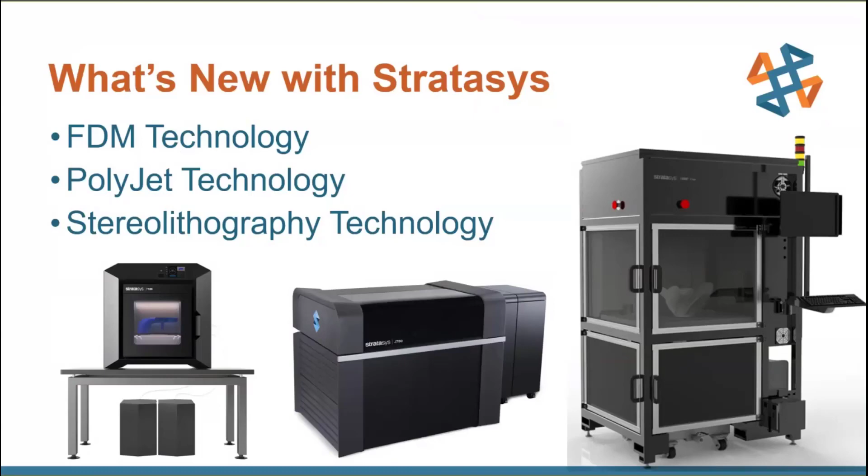Starting off with the FDM, which is fused deposition modeling. Most people are familiar with it because it's the most common out there with all the hobbyist type machines. Of course, the difference on Stratasys machines is that they use two print heads and a support material that will dissolve away, making it much easier to build parts.

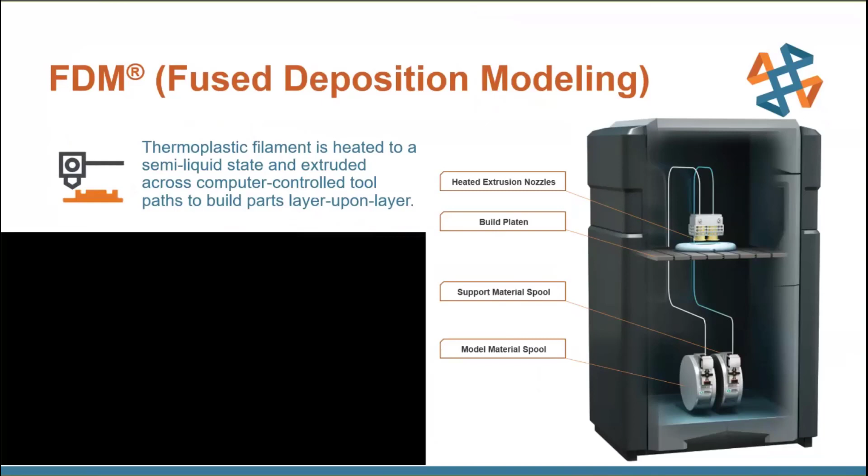What they've added to the FDM now is the F120 series, added to the F123 series. This is an industrial desktop model, and it's based on the F123. In fact, it uses the same platform as the F170, so the trays are pretty much interchangeable. They're the same size. The only difference is this is a desktop model. You don't need any specialized training, you don't need a dedicated technician for this, and it's very intuitive in the GrabCAD print software. We're going to talk more about GrabCAD software.

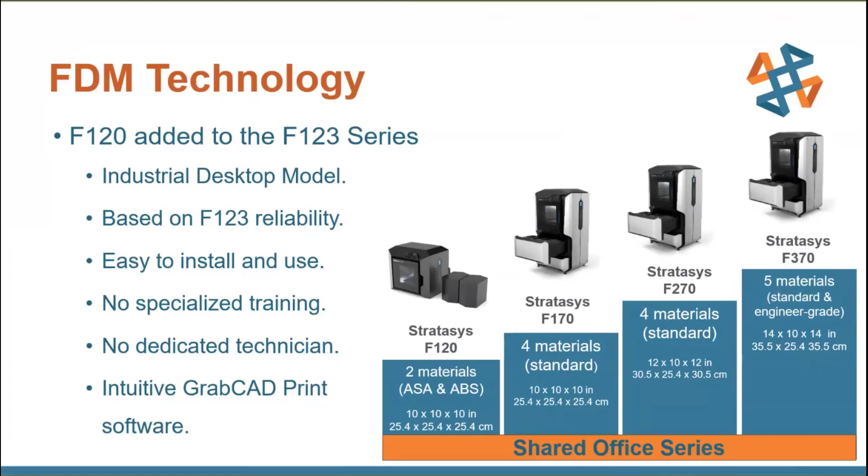It runs a build volume of 10 by 10 by 10. Currently there's two materials available, the ABS and the ASA. For those not familiar with ASA, that's a material similar to ABS, but it's got UV resistant properties, for applications where it's going to be outdoors. Right now there's only white and black, but the ASA is a good choice.

It has a soluble support material, and we build it in layers of 7, 10, and 13 thousandths of an inch. You'll notice in the picture, the two boxes on the bottom there are the print material. There's 200 cubic inches in there, and you can actually print for 250 hours continuously. So it's not like other machines that only have 100 cubic inches or less, sometimes 60, where you end up having to swap materials out. Here you're going to get a lot more runs, so it's more office friendly. People don't have to change materials out nearly as often.

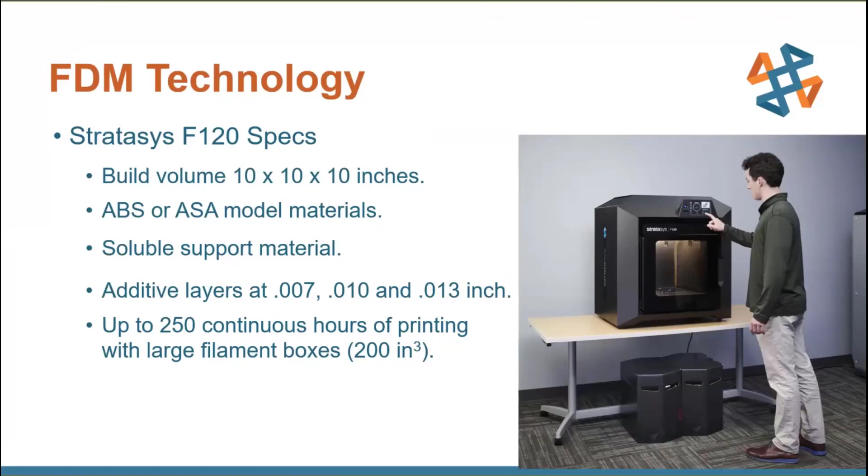Looking at GrabCAD print software and some of the changes they've done, I should mention that GrabCAD print is free software out there to download. You don't have to own a Stratasys machine to view and estimate files with GrabCAD print, so it's free out there. You can use your CAD files, you can use STL files, so it'll take native files as well.

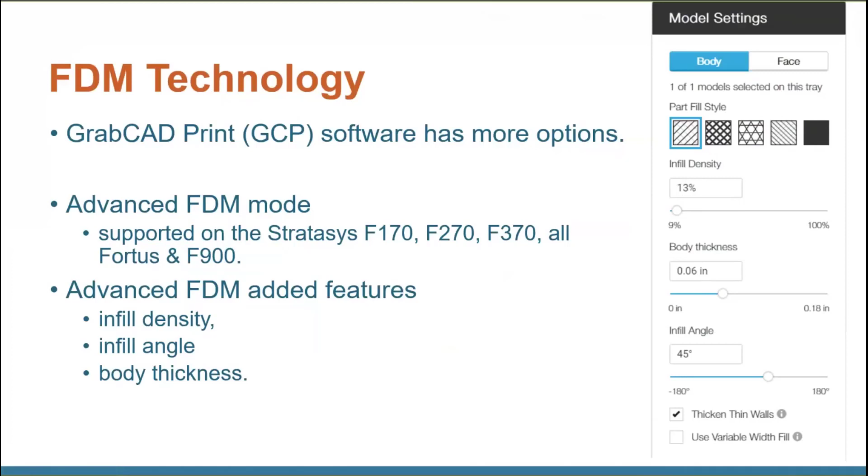What they've changed and added in GrabCAD print, you can see up here where they've put in different support icons so you can see what you're getting for your fill inside. They've really changed it, you can change your infill density here. If you want to make that wider or smaller, you could do that. Also the body thickness has been changed on here. You can add more body thickness. What that means is the perimeter or the border, if you decide you want your part to have 1/8 of an inch thickness and still be hollow inside, you could change that to 0.12, 1/8 of an inch. You can also change the infill angle on there. Currently 45 is the default. It works well, but it's allowing you to change that. So lots of new things with GrabCAD print.

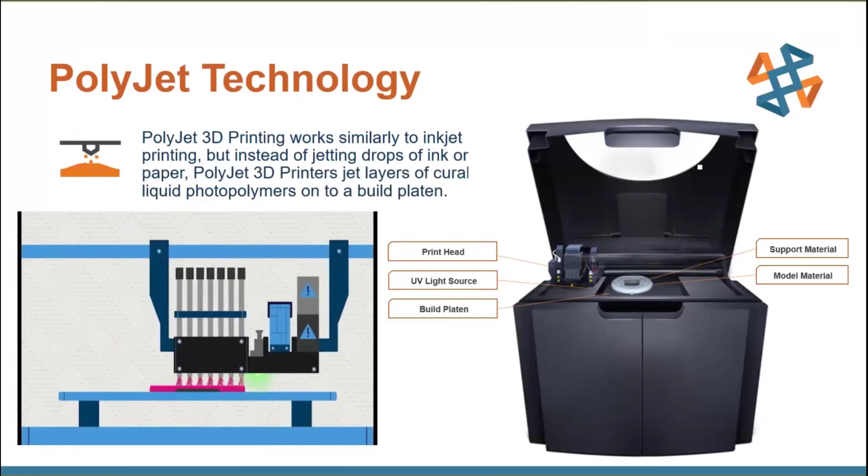PolyJet Technology is a 3D printer that works real similar to your inkjet printing head that you have at home. The only difference is you don't have a Z-axis on your home printer. Here you've got a Z-axis.

What's really changed on PolyJet is that they have a breakthrough. This is a milestone in 3D printing. Stratasys J750 and J735 are the first printers with the ability to print color quality validated by Pantone. Pantone is the industry leader defining standards that communicate consistent colors across many industries. So the Pantone colors here are

key to getting quality, realistic looking parts. In the GrabCAD print software, you can easily select almost 2,000 printable colors. You can select it either by the number, if you know it, or by sliding the range up and down the slide bar. So you're going to get good quality models.

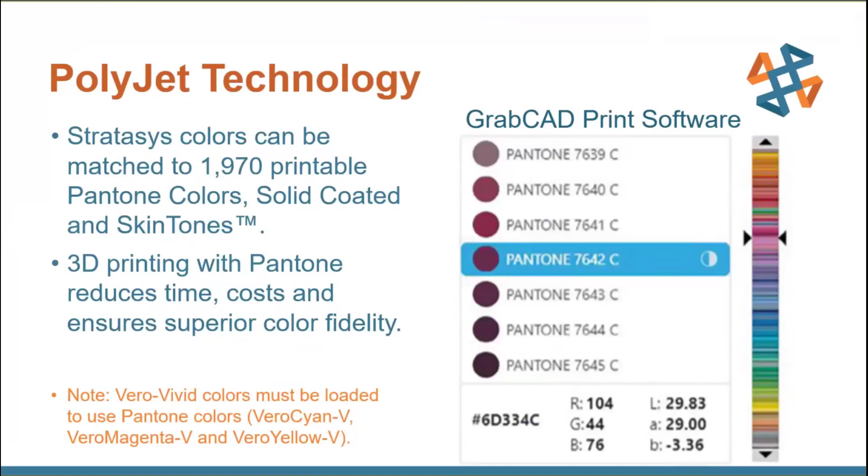Now another thing they've added is the Agilus 30 white. We've had Agilus 30 black and Agilus 30 clear for quite a while. Those are our stretching materials, rubber-like materials, flexible. And now you can take the white and you can add colors to it.

However, I will tell you that the more color you add, the stiffer it will be, because you're taking away more of the Agilus flexible material. Therefore, the more pastel your color looks, the softer it's going to be. So you can either pick a color, you get a little flexibility there, or you can actually pick the shore value and it'll tell you what color it's going to blend and be there. So there you can see a range of softer, will be the lighter colors, and as they get darker, those will be a little stiffer.

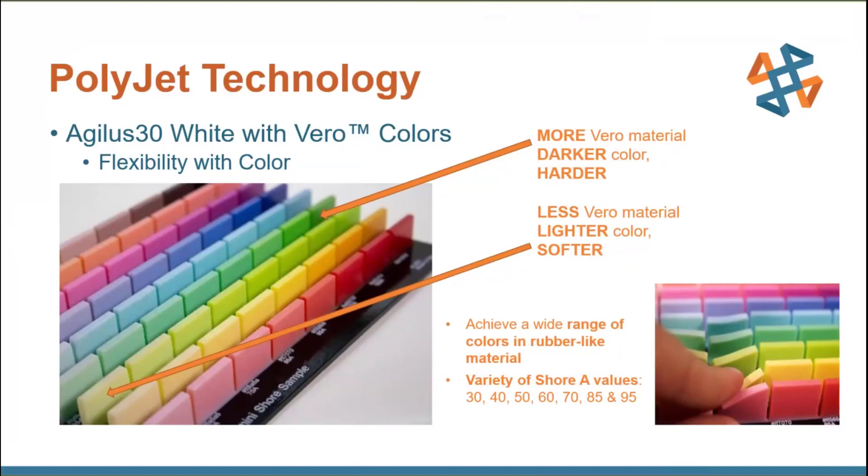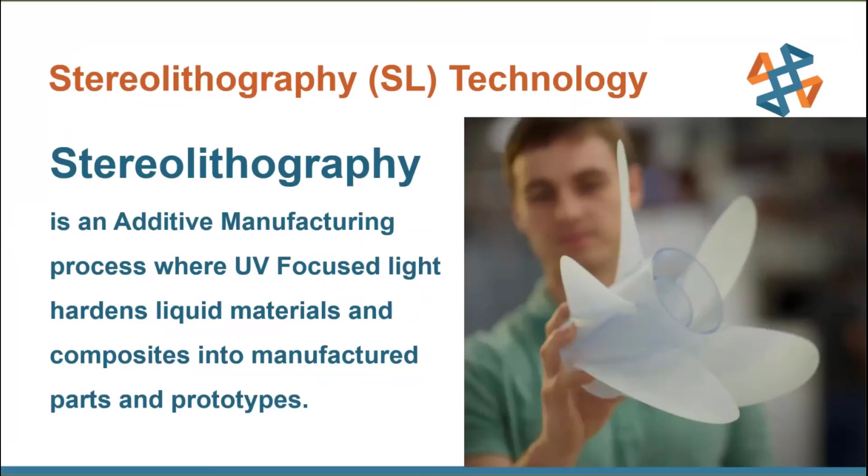Stereolithography has been around for 30 years. It's actually the first 3D printing patent that was out there. In fact, the word stereolithography was invented in 1984 for the patent. It actually comes from three Greek words: stereos, meaning three-dimensional. I know a lot of millennials think that stereo means two speakers. It actually means three-dimensional. And lithos is hard or solid, and graphos is printing or writing. So it literally means three-dimensional solid printing. That's where the whole 3D printing industry started.

Again, it's been around for 30 years. It's been accepted for a wide range of applications. So Stratasys is now introducing a stereolithography machine.

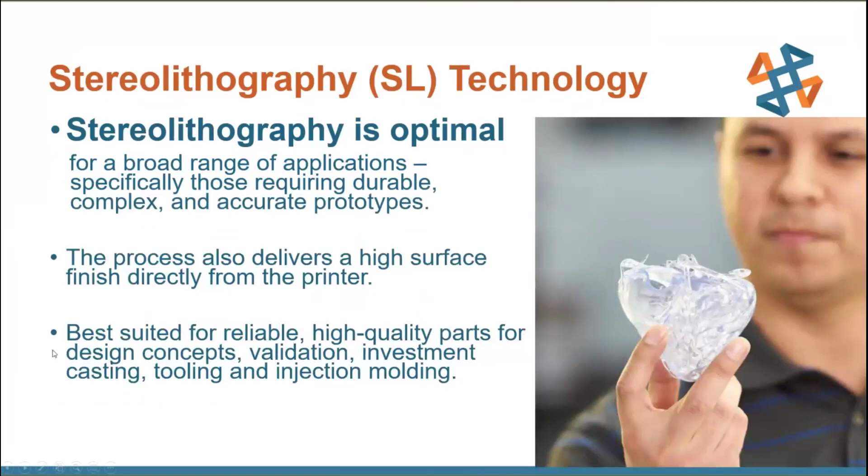Just to give you an idea of how stereolithography works, also called SL, it starts with a UV laser. The UV laser shoots out an ultraviolet light, goes through an optics filter, and that separates 355 nanometers in there. Now, once you separate it, it has a scanning galvanometer. That really is just a servo motor with a mirror on it that is going to position and focus and move that beam that's focused on the surface of the resin in the vat.

Now, the platform goes up and down in the z-axis. The scanning mirrors take care of the x and y, and your z-axis is taken care of by the platform. And it hardens each layer one at a time on the top until you build the entire part, and it repeats the process.

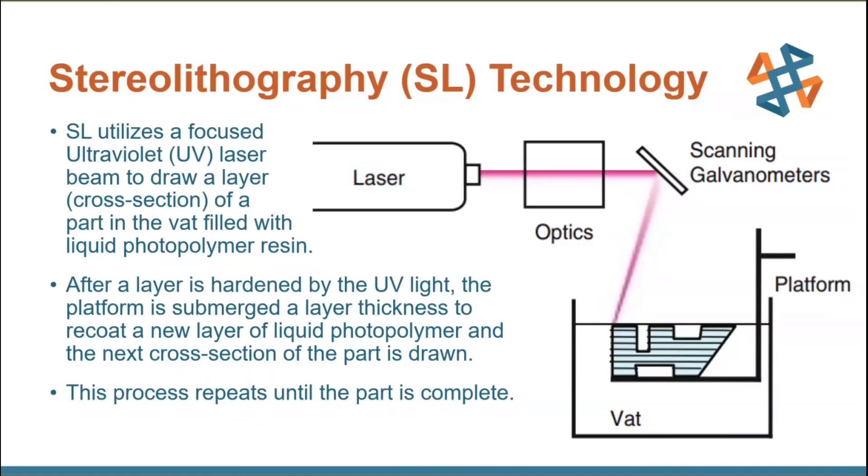So we're introducing the Stratasys V650 Flex. The V stands for vat polymerization. That's a designation from the ASTM F42 standard that defines additive manufacturing technologies. Flex refers to flexible for an open source material. You can run any resin you want in this as long as it will cure at 355 nanometers. Therefore, you could develop your own material if you wanted to.

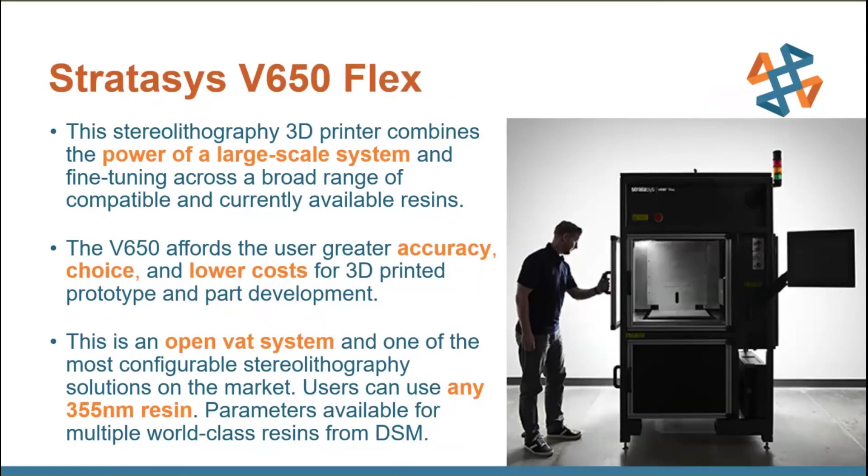So it's got a large build volume, 20 by 20 by 23. This is going to really help for production type parts. You can get down to 0.004" build layers. You can build greater than that, but 0.004" is typically what you get down to. The beam size is adjustable for fine detail, or for big parts, you can go up to 0.030". And it's got a fast draw speed of 700 inches per second.

Again, on the vat system, the customer can use any resin they want. But we're starting off with 4 profiles or set of parameters of DSM resins that are commercially available. DSM Somos has been in the business for many, many years, making stereolithography resins, recognized as a leader in the industry.

You also have interchangeable vats, full, quarter, or half vats. And the reason this is important to you is not everybody builds parts 23 inches deep. So if your parts are only 9.5 inches tall, you may want to consider a half vat so you don't have as much investment material, the liquid material, in the vat itself. There you've got some choices on your vat size.

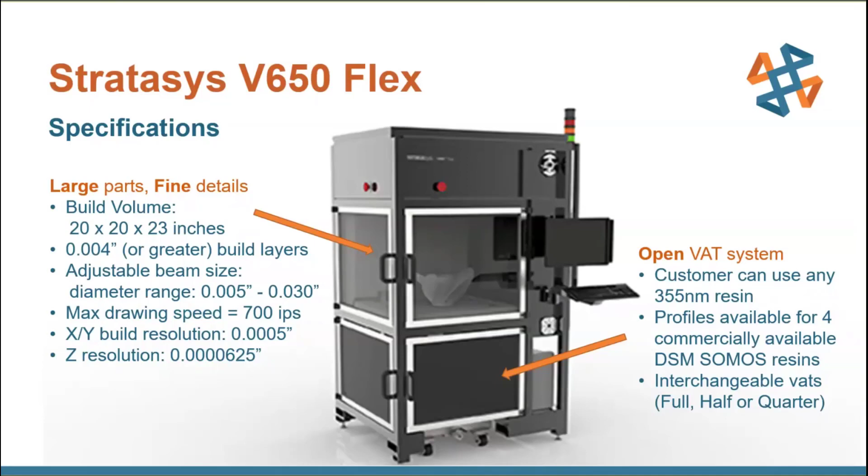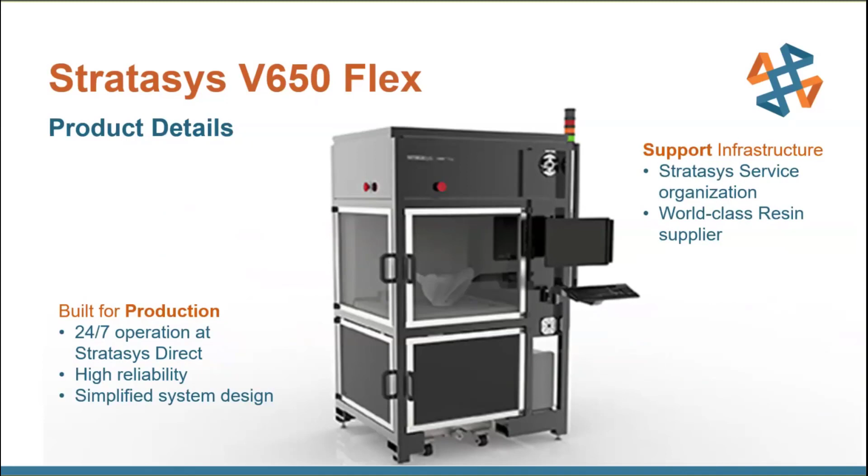It's built for 24-hour, 7-day operation. This has been tested at Stratasys Direct, the service bureau that Stratasys has, and they've been using it for over 4 years now. They've been using 24 hours, 7 days a week operation out there. High reliability. It's a very simplified design.

One of the problems with stereolithography from the foreign market out there, there's a lot of them out there, is getting parts and getting reliability issues. Here we're going to be coupled with the support infrastructure that Stratasys already has, and we're going to couple with a world-class resin supplier with DSM Somos. So that's going to help our reliability considerably.

Your site requirements, it's got a smaller footprint than the competition out there. It doesn't require anything special. You can run on 110 or 220 out there, single phase.

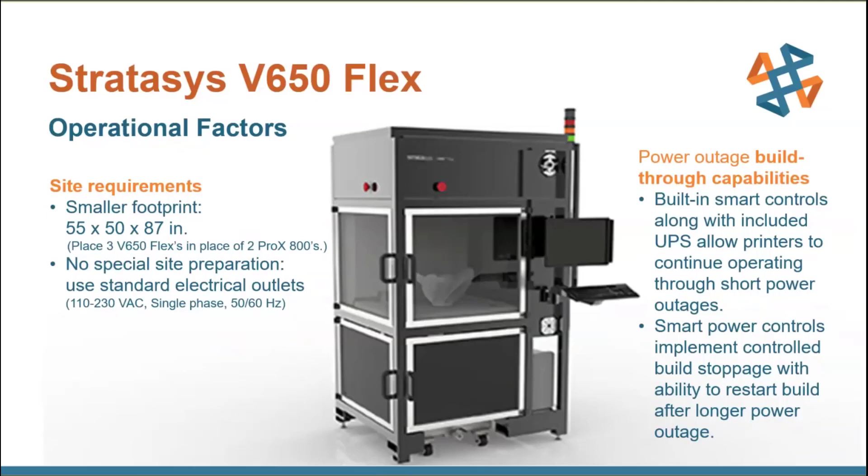It's got some smart controls built into it so that it allows the printer to operate for a short time. It also records the build layer it's on, so if you've got a power outage that lasts longer than the UPS backup, you can actually restart the job when you get power restored. That's a key function when you're building big parts.

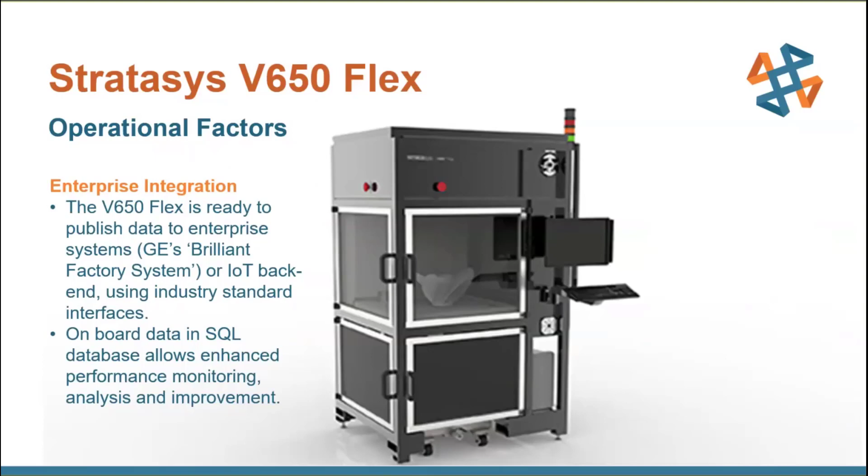It also has the integration for a database, so you can interface, communicate in database for your monitoring. Lots of companies out there that want to monitor, to do SQL language in there. They also want to do statistical process control. This monitoring allows you to do that.

Let's talk a little bit about the materials, so you can know the difference between photopolymer materials and engineered plastics. When you're running with FDM materials, your FDM materials are softening plastics. ABS, nylon, all those engineered materials out there, they become pliable and moldable in injection molding.

Think of it like a chocolate bar. You can melt that and form it, remelt it and form it, melt it and reform it all day long. Now your photopolymers are a thermoset material, not a thermoplastic, but a thermoset. Once that liquid is kicked off, think about a two-part epoxy. Once that material is kicked off, you cannot put it back into a liquid form.

Once cured—and I've got an example down there, it's crackers and some flour—you mix that flour with other ingredients, but you'll never be able to pull it back out and get it back to its shape where you can make crackers again. So it's a thermoset material. It can be burned out under high heat, but it will not melt.

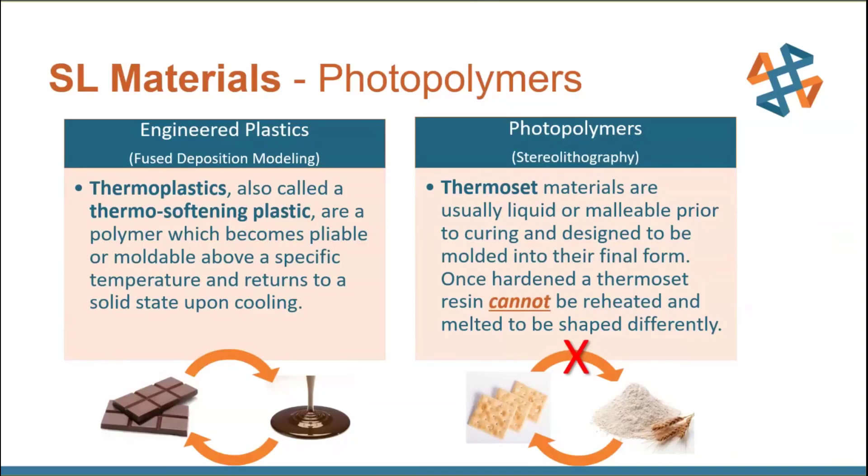So the four materials we're looking at with DSM Somos: the first is Somos Watershed XC. That is a rigid, clear material that has been used for well over 10 years, and it's the most popular general purpose material on the market due to its clarity and water resistance. This is one of the key general purpose materials out there.

The next one is a Somos Next material. This is tough, durable, impact-resistant—you can bounce it on the floor without breaking it. It's really tough, and it's for general use parts. But both of these will work well for the majority of parts. The high impact Next is great if you want toughness, and of course the Watershed if you want the clarity.

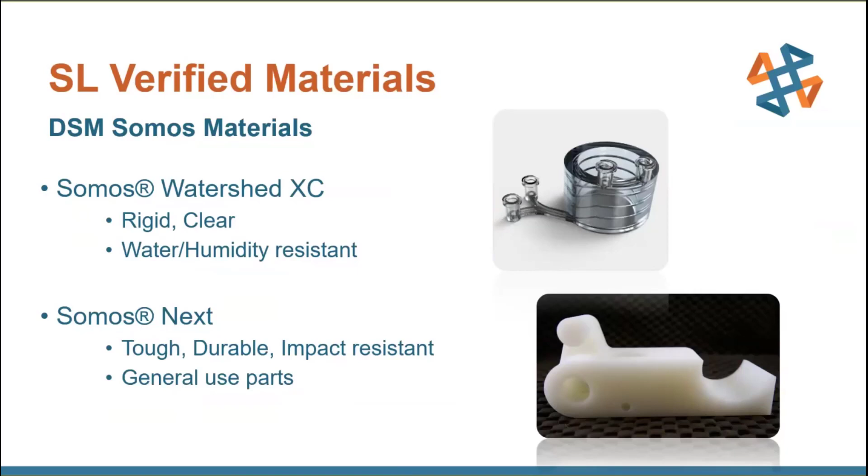Now, Somos also makes resins for particular applications. They have specialty resins. Now let's look at a couple of those.

The Somos Element—this is strictly for the investment casting industry. It has no heavy metals, antimony in particular, no heavy metals. Those can contaminate your castings when they pour the metal in, if there's any left in there. Also, it has low ash during the burnout cycle.

Somos Perform, down there—it's a ceramic composite, very high temperature resistant. So this is really great for plastic injection molds or even under-the-hood automotive uses. Also, if you're going to nickel plate or chrome plate your parts, this is a great material to do that.

And the reason is because it's ceramic, it has very little coefficient of thermal expansion. What happens when you plate parts that are 3D printed—usually you may put them under the hood, they'll be chromed, and as your hood warms up, that plastic stretches. As it cools down, it contracts. Well, that plating does not contract and stretch at the same rate, so it's going to end up flaking off.

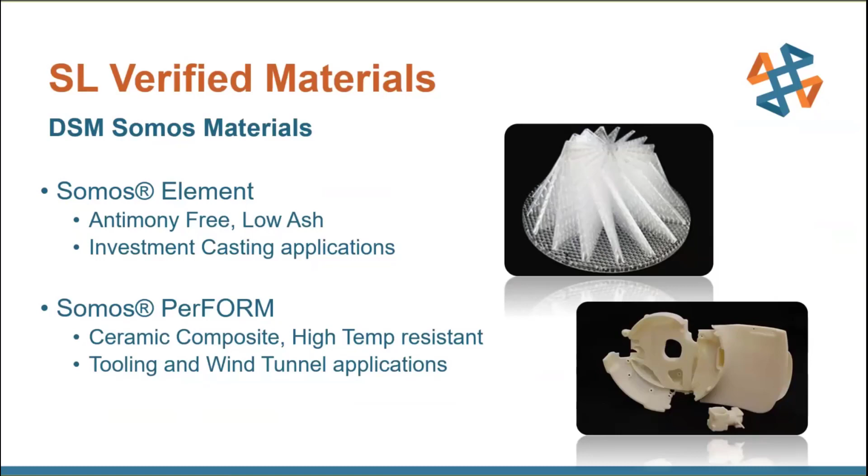And that pretty much covers everything we wanted to talk about as far as the three technologies and what's really coming out new. If you want more information, I'd recommend our website.